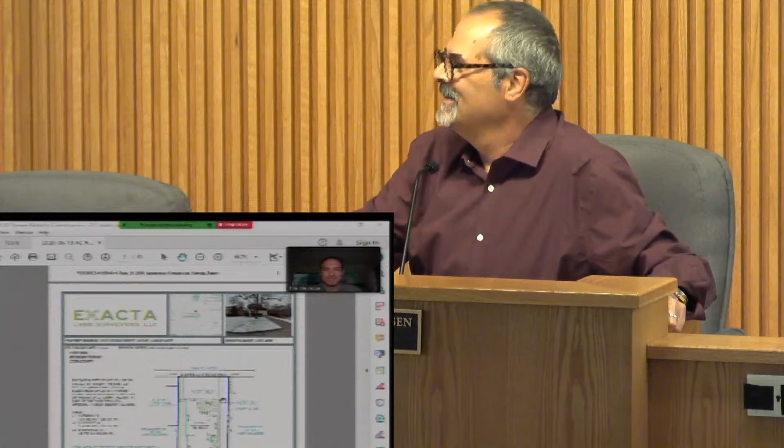Fantastic. All right, so the commissioners are just seeing it for the first time, so bear with us as we take a look. I'm happy to give a quick synopsis if anybody wants that, but I've been on appearance review commissions before, so by all means, let me know. It looks great, looks awesome. Yes, there you go. Floor plan. How wide is that lot? Oh, it's 50, okay, 50. Yeah, I think the survey measured it at like 49 something, but it's recorded as 50. Okay, no, it looks great, awesome.

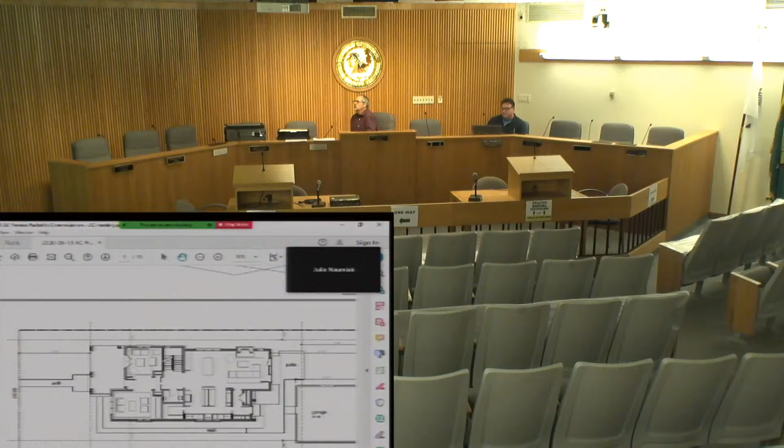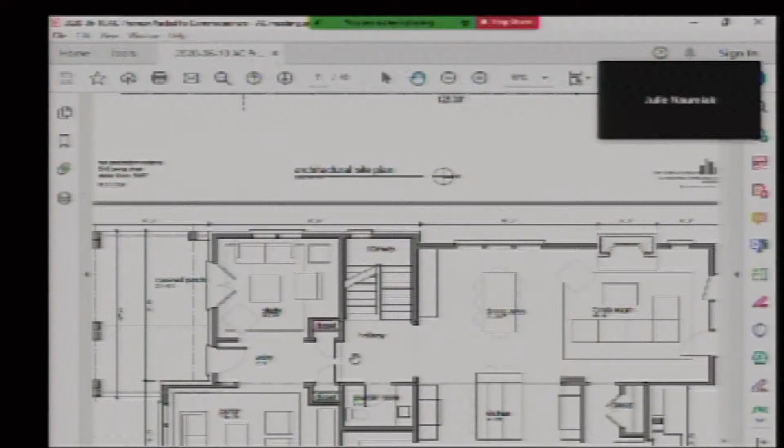And the aesthetic approval would also be subject to any code review at the time of permits. We would need to confirm the distance between the detached garage and the house, and any lot coverage will be confirmed by our zoning administrator. So there might be a few tweaks or another step that needs to be taken to make sure those code requirements are met. Yes, okay. I think I discussed that with Nate today, and yeah, if we have to make a few tweaks to the garage to conform, we will do that.

Okay, so front elevation, west elevation, full and partial. Sorry about that—I wanted to keep it at scale but didn't want to break it up, so I have a smaller full version and then the one that's at scale. I just couldn't get it to fit on an 11 by 17. So this is the full, and then this is a detail of the back, and these two are to scale.

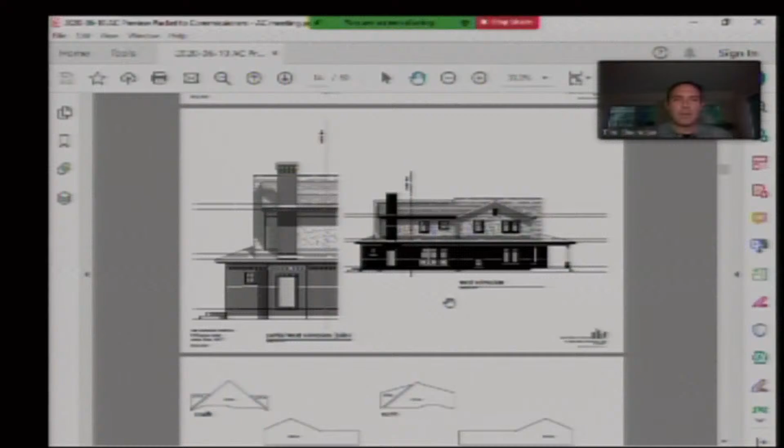Tim, can you walk us through the materials on that elevation? Or Carrie, go back to it—pick an elevation. That one? So that's the west elevation. We have the brick on the first floor, and then obviously the chimney.

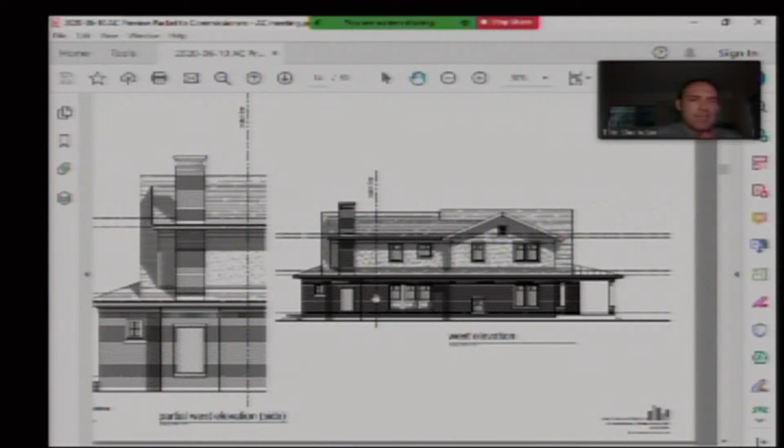That brick is listed, and we actually don't have the PDF of the material samples—yes, there it is. My eyes aren't that good, but it's a Glen-Gery brick, a white tumbled. The whole idea behind this project was to do something like a cottage, and Julie really worked hard finding this brick that she liked. The second photo with the mortar shows an off-white mortar that works well with the color of the brick.

Then a simple Timberline architectural roof, not a 3-tab or anything like that. Windows are black—that's a Pella color. I have a Marvin color too, and I can't tell the difference other than the shapes are a little different, but I think currently we're thinking we'll use Pella. If we end up with something else, we might have to come back if the color is really different, but since it's black, I don't think it'll be that different. We'll update everyone as we go through that process.

Then the stucco and the trim—the stucco is a bone white, and the trim is going to be a super white. So we're mostly white with black window trim for the most part. Correct.

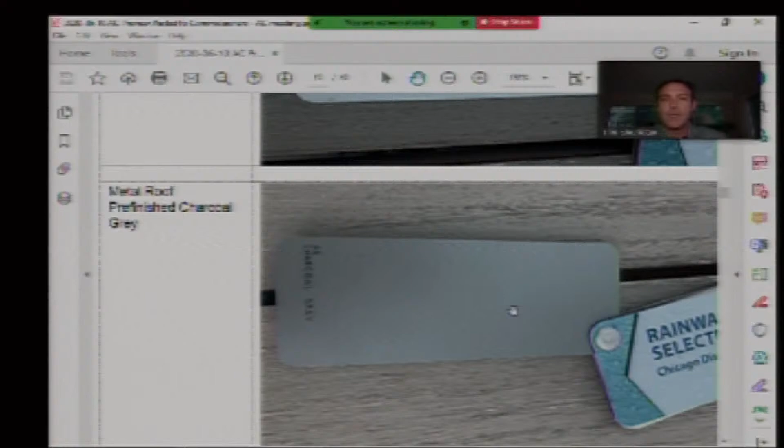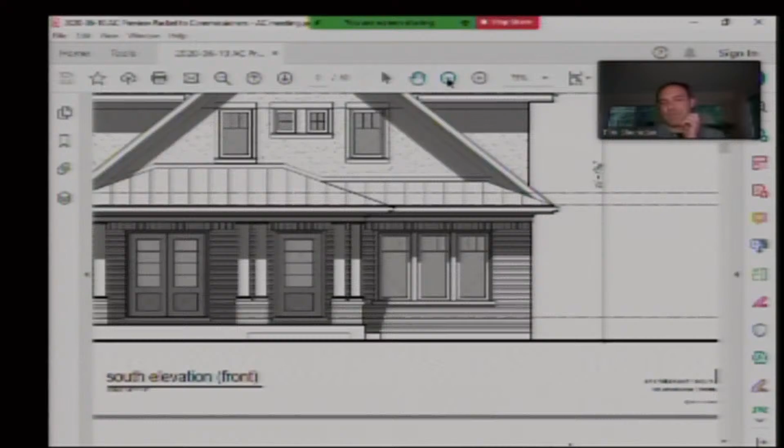Black roof, and then this metal roof is going to be a pre-finished charcoal gray, and that'll be for the porch. Could you go back to the porch, please, so we can see what that reference is? We'll get there—there's too many other things open here. It's all the way at the beginning. There we go—so yes, the porch and actually the little front part over the projected living room, or parlor as we call it.

Looks pretty good, Tim, it looks real good. Thank you, that's a beautiful design. I'm just wondering if the porch roof should be a little darker, if the roof is actually that dark—that's just a comment to provide contrast. It just looked like it's severely contrasting to me, that medium gray versus a charcoal.

Yeah, I think we were trying to do something that wasn't the roof color, frankly, and get a sort of contrasting color in there that wouldn't be black, because the windows are black and the roof is basically black too. So we wanted to have that sort of third tone—I think that looked very nice. It's just, that was just a question.

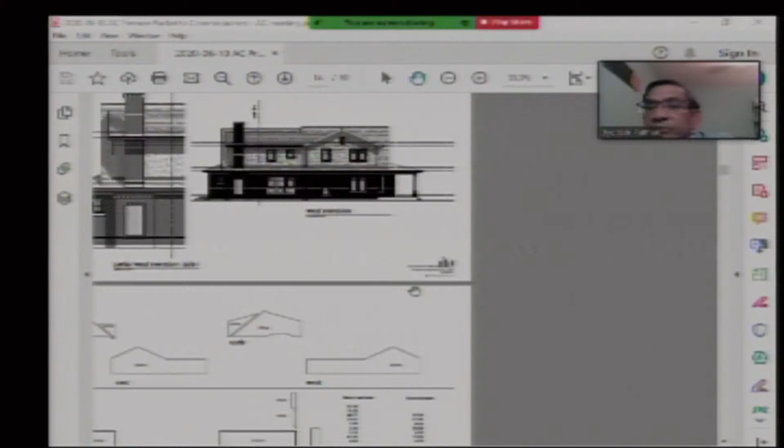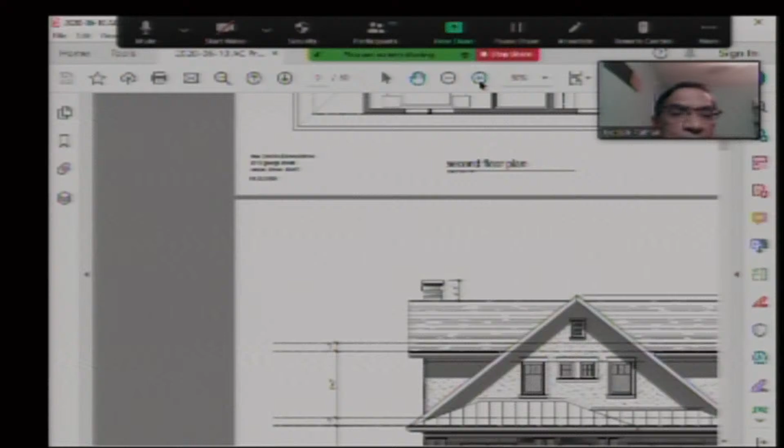Well, any other comments, Mary Jane, Jay, on that? I have just one comment—no, I like it, I especially like the brick. Yeah, I also like it, but I want to ask, the total height is more than 28 feet—is that okay? Oh, I think it's 26 something, plus if you see that 2.5 feet, it shows 26 and 7 each, or plus 2 feet 4 inches or something like that, so the total is 28 plus something.

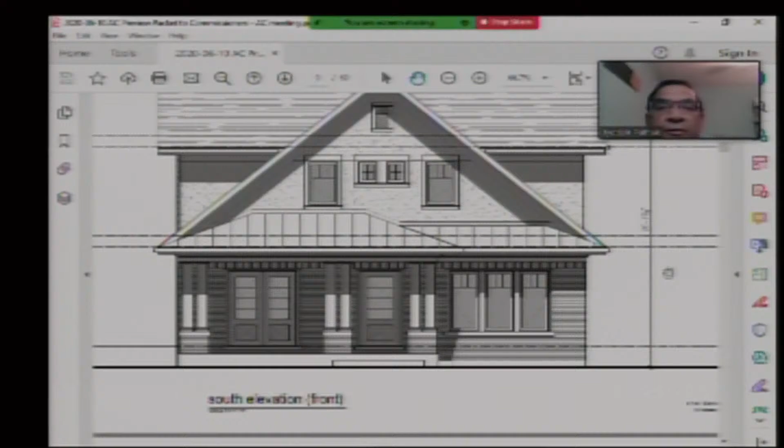Does the roof count in the overall height? Excuse me, does the chimney count in the overall height? I believe it just goes—well, it says allowable overall projection height is 26, 26 and 8, plus 2 feet 4 inches. So a chimney is an allowable projection, so this would be compliant, but I'll have the building administrator confirm that. Okay, yeah, I thought 28 was allowed.

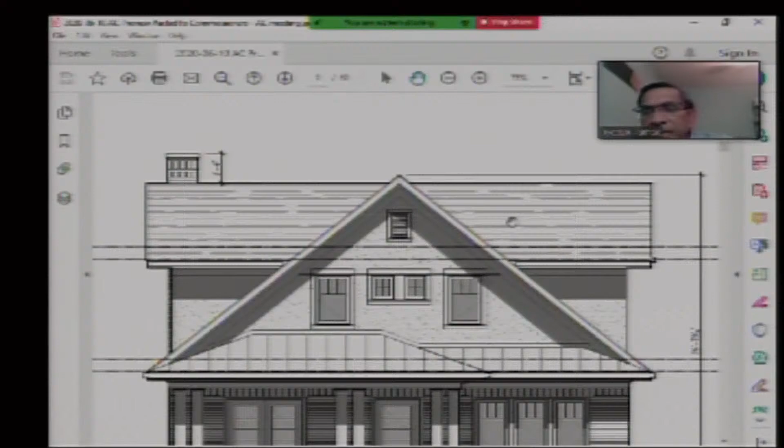Well, it would be higher than 28 feet if you take into account the chimney. So we can make the motion to confirm that it is compliant, Jay.

Okay, are there any other comments? Nope. Julie, do you want to ring this one up?

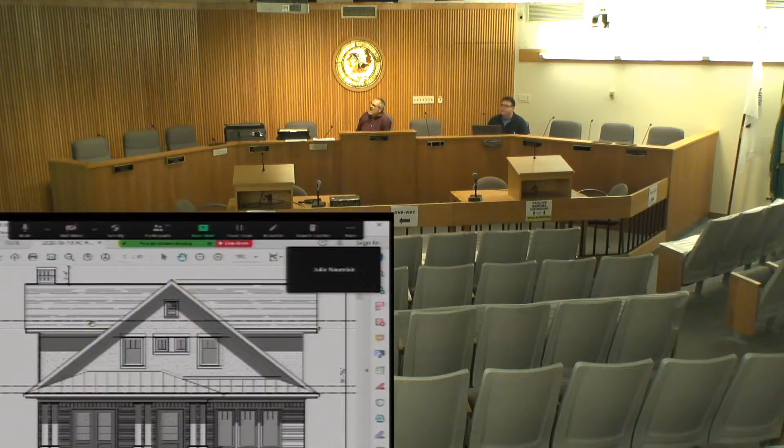Okay, I just need a case number. Case number is 2020-021A. Is that good, or should I zoom in more? 21A, okay, there we go.

Make a motion that a certificate of appropriateness be granted in case 2020-021A at 5312 George Street as presented. Anyone second? Second. All in favor? Aye? Any opposed? No opposed, so passed.

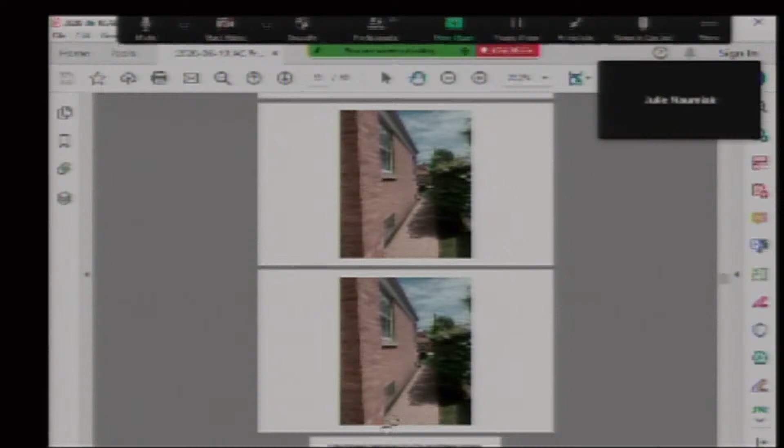Like a screen porch, and they're planning on enclosing it. So these are the existing photos of the existing conditions. This is the front of the house. This is an addition? It's enclosing an existing screen porch, so they're looking to fill in. There's no additional footprint, Carrie - it's heated, air-conditioned space.

Yeah, so any approval, though, we think it should be okay. The footing, we just confirm that it's compliant with code, so.

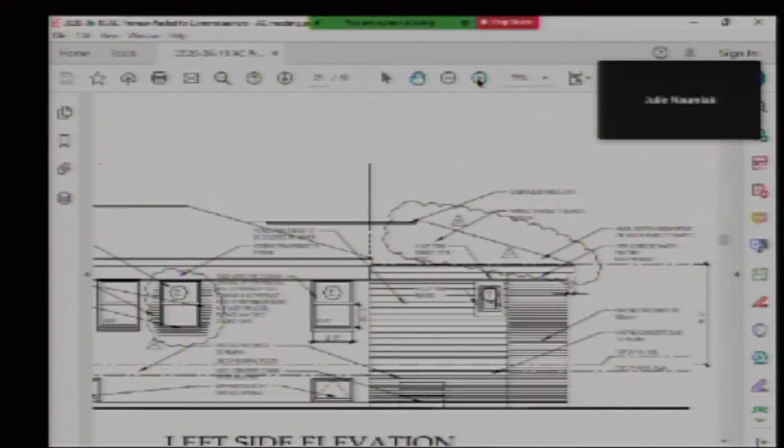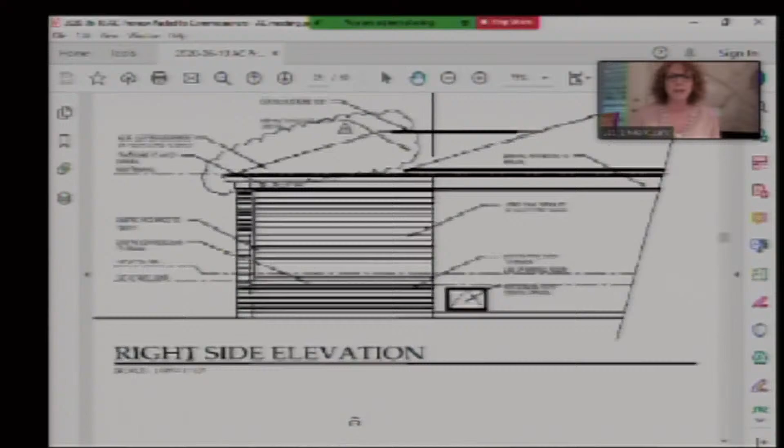I don't know if Leslie, if you would like to add anything? Sure, if that's helpful. This is an existing space that was permitted and added to this building years ago, like maybe 15 years ago. Completely permitted. It is on a full foundation. It is a raised square footage. It's just been a screen porch since it was built. It has a chimney in the corner of it, which was used as a fire, like a grill.

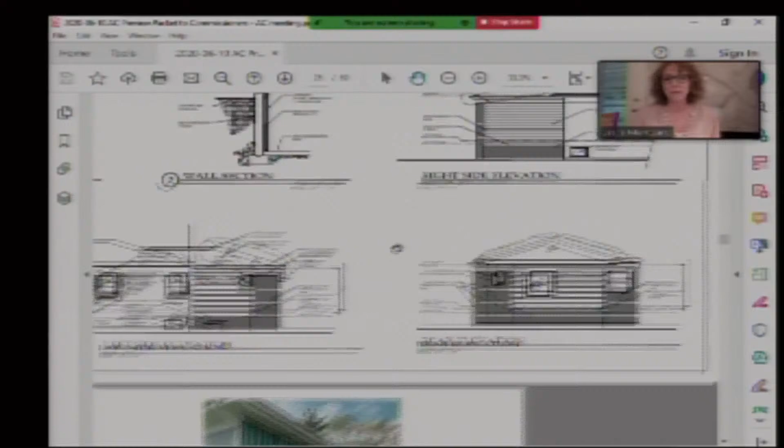It's very interesting, I'm sure it was the life of the party kind of house. But we have decided that most buyers would prefer to have a master bathroom instead of a chimney inside their home, so we're going to just hopefully enclose it. And it's a very simple change to the house. We're not adding square footage, we're not adding to the footprint at all. We're just enclosing what's already there. It's already on brick, really a very small change.

Hopefully you'll agree it looks a lot better than what's there right now. And the materials, Leslie? The existing brick will remain, and if there's places where it has to be repaired, it will be repaired with identical brick - it is still available. And then there'll be siding in the area where we enclose the screens, and the siding will match the front of the house. Okay.

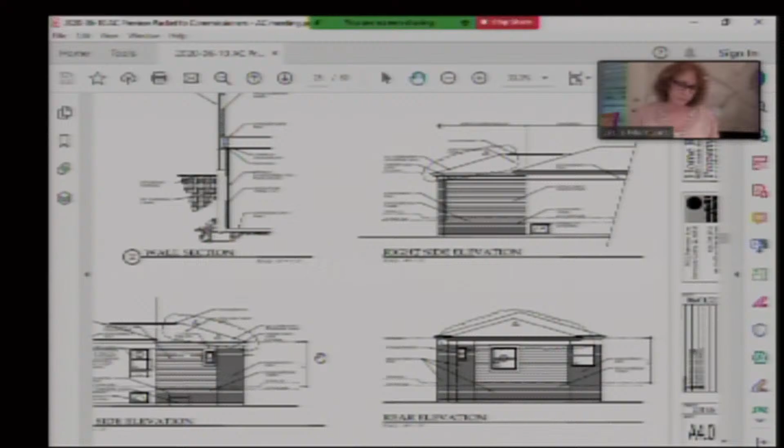Okay, sounds good. Comments, anyone? I'm okay with that. Okay, I'm good with it. Pat, do we have any comments from the public? No public comments have been received. Okay, I think it looks fine.

Jay, are you able to make a motion on this one? I'll make a motion. Case number 2020-023A, 9023 Laramie Avenue, to be approved as presented. Anyone second? Second. All in favor? Aye. Any opposed? No opposed, so passed.

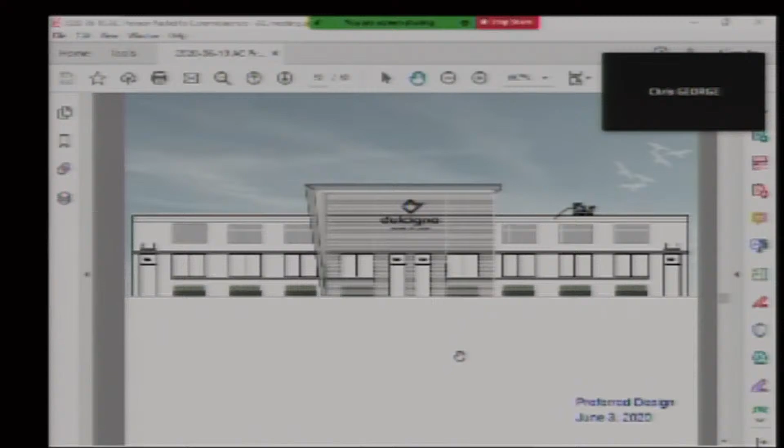Can you tell us about it? Yes. What we're trying to do is just accent the main entrance to the building. So we're sloping on the left-hand side, when you're looking at the front, it slopes up, projects a couple feet out from the building, and we're extending the parapet up to meet that across the front.

And then we're gonna put a new facing on the front. We wanted a wooden look, but maybe we could use some kind of fiber siding instead of those panels you're looking at now, a Hardie board or something of that nature that has a wood look. You can't use wood on it, but the wood look would probably soften the look on the front of the building. I agree.

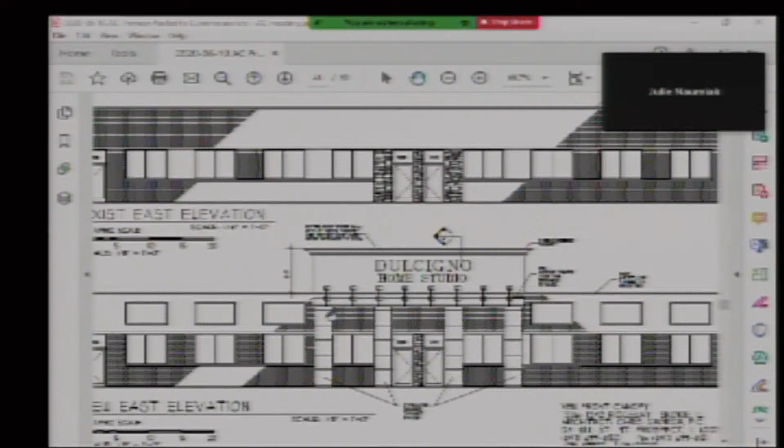So would you like to just skip over the previous design? That one's not gonna be used, right? Yeah. So this is the existing facade. And this is where the new entrance, the main entrance is, and that's where the new roof is gonna go. Big difference.

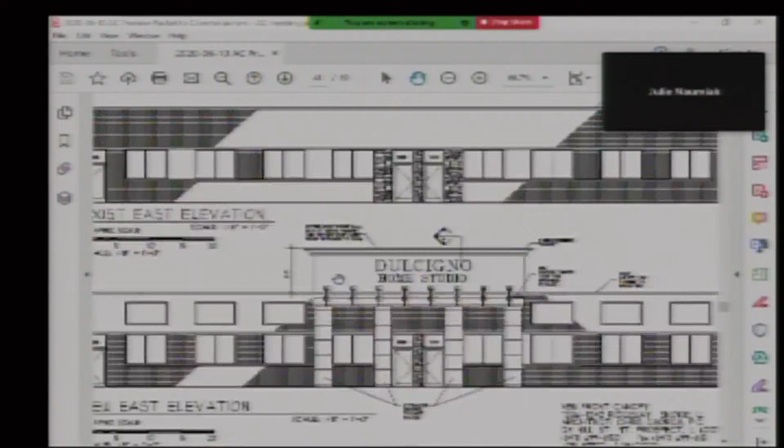I just want to note, do you know how deep you plan on having the roof project? A couple of feet. Okay, so you could go up to 3 feet by code, since the building is right at the 25-foot setback. If you choose to go deeper than that, then you would need to go through the zoning board of appeals. We're gonna keep it less than 3 feet, I don't think it's gonna be more than 3 feet.

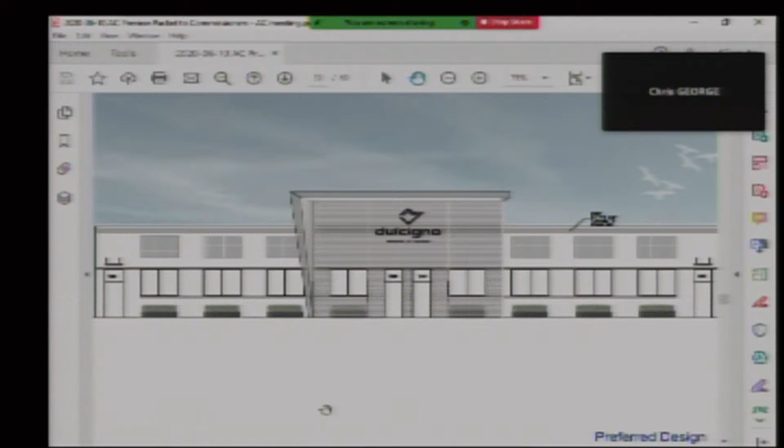So, with the exception of the entry, are you doing anything to the existing wings, the general elevation space? New windows would all stay. What we're gonna do is above the windows where you see the little colored areas, we're gonna just put some kind of a surface mounted accent to break up the brick, because the brick is so mundane looking across the front. Just wanna break it up with panels.

And we did discuss yesterday if the Appearance Commission supports the idea of these panels, to shift them a little farther away from the parapet, so it's more in proportion with the rest of the building, just giving it a little more breathing room between the top of the panel and the parapet.

So these are surface-mounted metal panels? Yes, or some sort of awning material. And the projection is a couple, 2-3 inches, it's not gonna be deep. So should it be companion or comparable materials to the main entrance materials? Wouldn't you think that would help? I would think that would help, yes. Something that matches.

I don't know if I like it. Staff, or commissioners, any thoughts on the panels?

I don't have a problem with them at all. Arshana? Well, I don't understand the rectangles above the windows. What purpose do they serve?

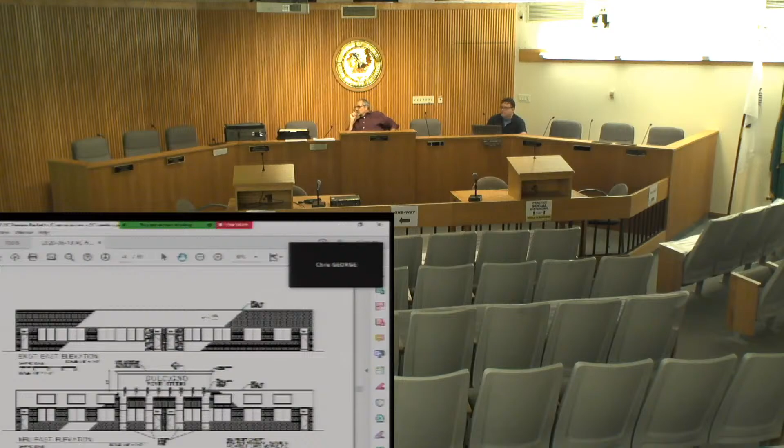I wish we had a picture, Chris, but that's just gonna break up the long mass of masonry that goes straight across the building. We were just trying to break that up, add more color, just something on top of those windows to look like some kind of awning or a panel, or some kind of, just to break up that.

It's decorative. Very decorative, just decorative, nothing protruding out. Nothing, just something decorative above that. Are you doing anything to the existing brick? No, nothing.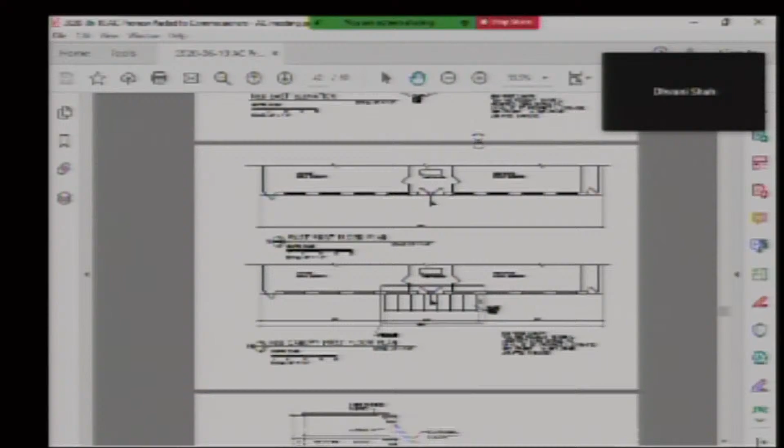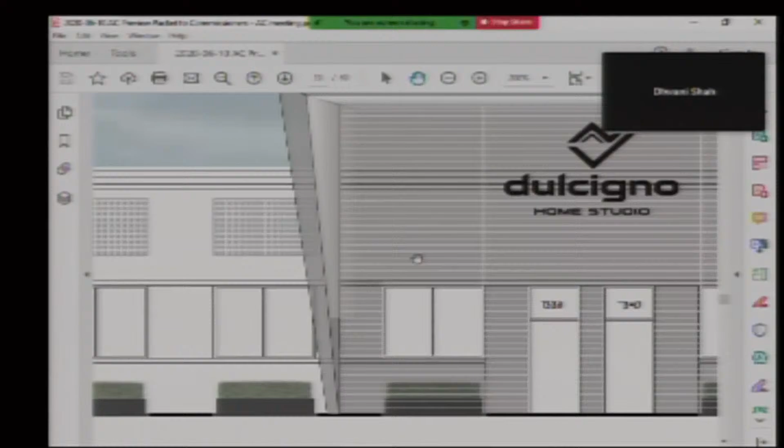Any other comments, Arshana, what do you think? Can you go back to the front elevation? I mean, the siding, can we space out the siding more, or? Like right now, how the elevation is, the front? What material are you gonna use? Is this what they were talking about wanted here?

Something with a wood look to it. So I was thinking maybe a Hardie board that looks like a wood grain, and that would be just mounted right to the masonry.

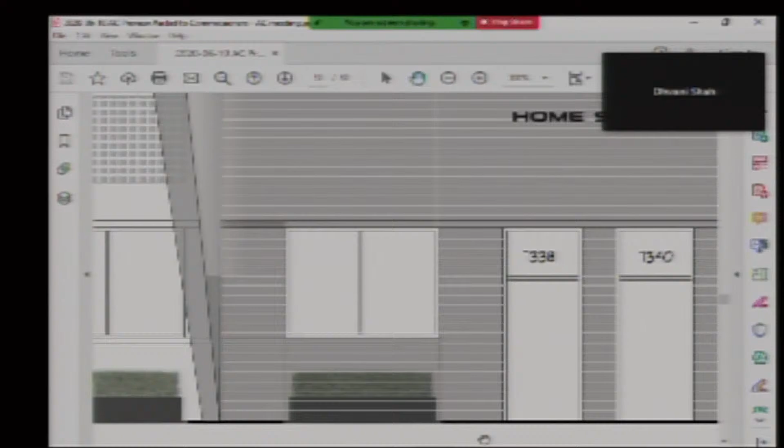Can we space them out more? Right now they look, is it going to look the same as it looks right now? Well, it would look like siding on a house, right?

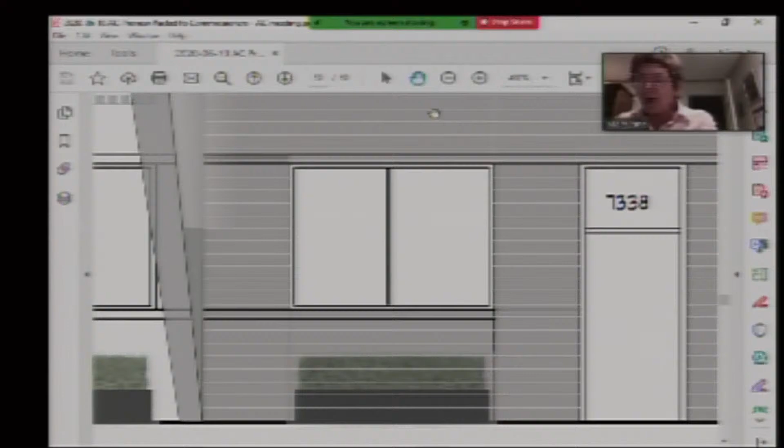So the gray is Hardie board because it looks like metal, kind of. Well, when the sketch was done, we were undecided on what kind of finish to make it, just like you see the squares on the decorative stuff. But if you could visualize siding, that's what it would be. And it's going to be Hardie board? Yes. Okay, thank you.

Well, I would be personally in favor of losing the surface-mounted panels, but I'll leave it up to the vote. Any other comments, commissioners?

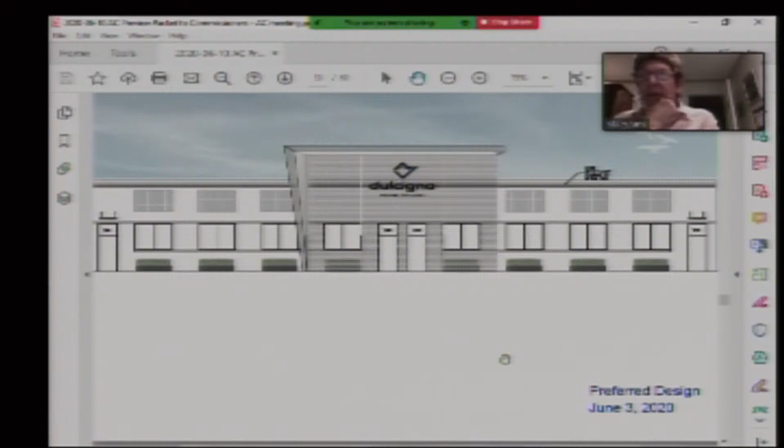Julie? You're okay? Yeah, I think it's fine. I mean, I think the panels, as long as they complement the focus of the center. The colors are cooperative. I think it's a better balance with that massive center to have some weight on the top. All right, well, why don't you roll that into a motion then?

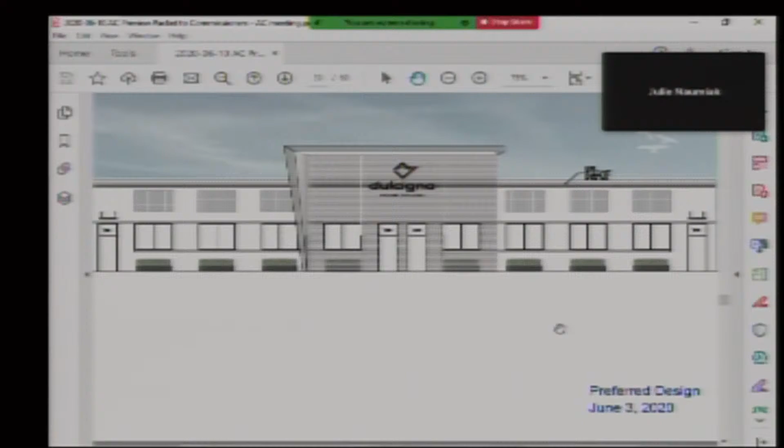You said it so well. Oh yeah, I gotta get a case number now. We'll get there. Oh dear, there you go.

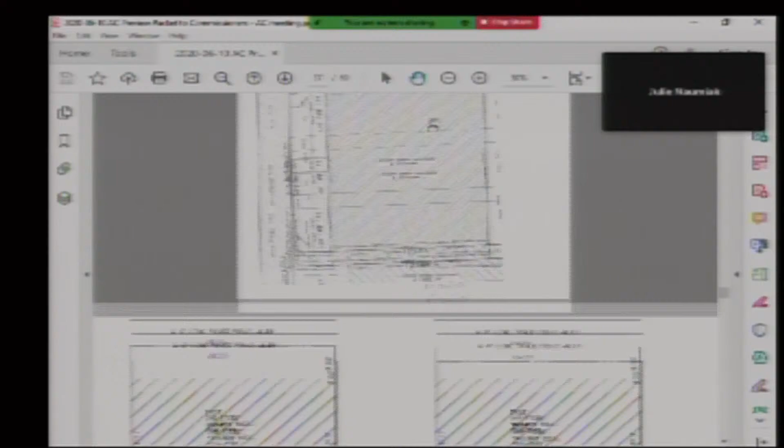Okay, I make a motion that a certificate of appropriateness be granted in case 2020-020A, 7336-7342 Ridgeway, with the provision that the focal center entry and the panels or decorative applications to the front of the building over the windows be complementary in color and type.

Anyone second? Second. Mr. Chairman, we haven't received public comment on this. I'm sorry, are there any public comments? Thank you, no public comments. I heard a second. All in favor? Aye. Any opposed? No opposed, so passed.

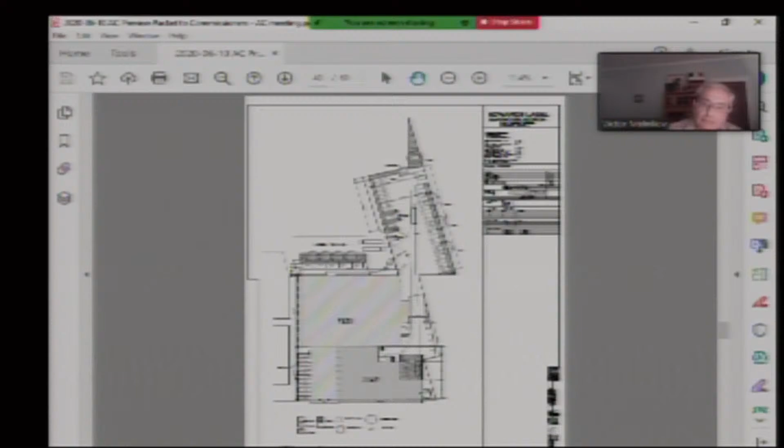All right, bear with us as the commissioners get to see it for the first time. Okay, here. So this is the whole site here, and this is the existing building. And then this is the proposed addition, zoomed in for the addition.

Victor, would you like to discuss the design? Yes, materials and colors. This addition, this warehouse, occupies the interior courtyard of the existing building. It is bordered with industrial zone buildings on the south and on the west, and the existing building on the other two sides, so it's completely inside the existing territory. The addition is offset from the west side about 65 feet from the property line, and on the north side it's offset from existing property line about 200 feet.

This is the metal paneling for the exterior, combining vertical and horizontal paneling in two colors. The light color is sandstone. This is the existing elevation, and this is the courtyard that's supposed to be built, enclosed. The combination of two colors, one is granite from the PAC-CLAD company. These colors aren't very representative, but you'll see the combination of light bronze and kind of tan sandstone. These are the colors we propose, with windows, square windows with a dark bronze frame.

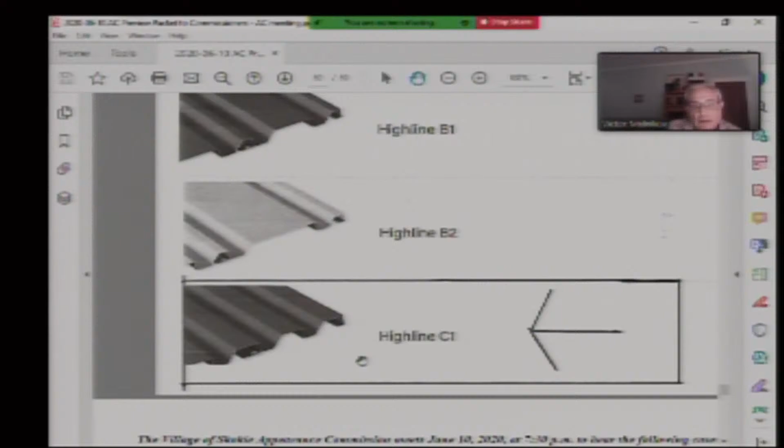This is the profile we suggest for the exterior paneling, and this is the texture. We already passed preliminary design with the commission, which has no basic objection to the building.

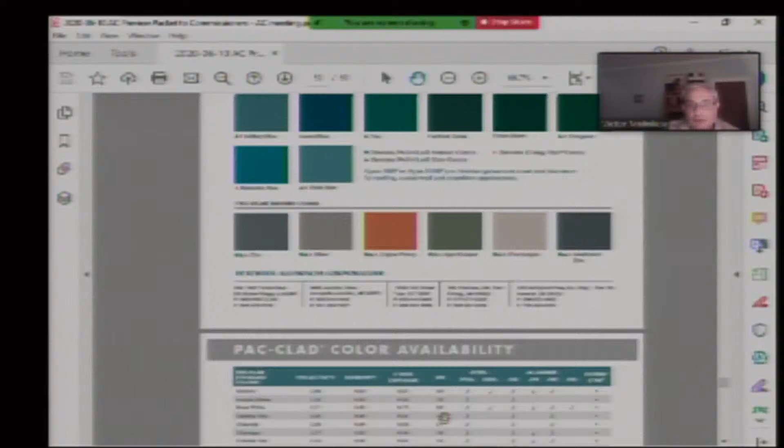That's all, looks good. Are you doing anything to the other existing elevations? No, it remains like it is.

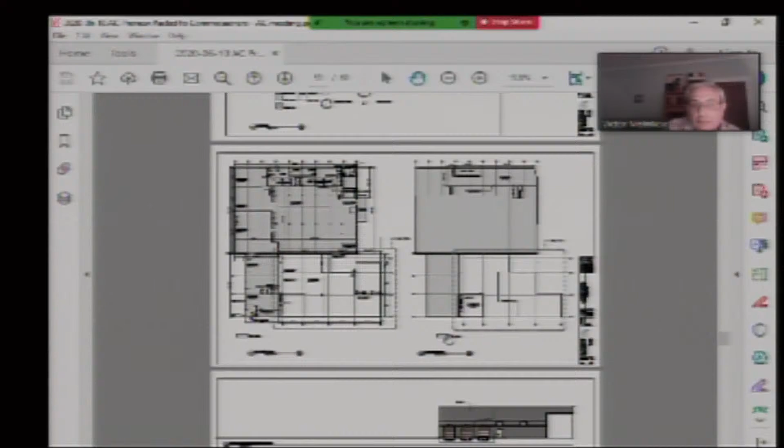So Julie, could you go back to the plan so I could see? This is like the vine wall that had vines on it, and this was the painted light color painted concrete masonry. There's an alley here. So how do we transition from the new elevation to that existing elevation that it butts to? We'll work on the south elevation.

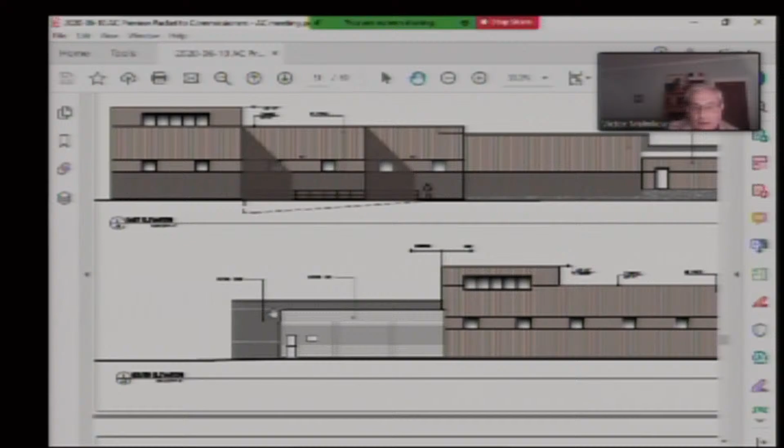This south elevation faces very close to the industrial building. It's not visible actually, this is a garage from this side of the building. So it's in the distance right here, this darker brick, and then this is kind of projecting south of the existing garage, and this is the proposed south elevation of the addition. So on the south, it's completely enclosed by the existing building.

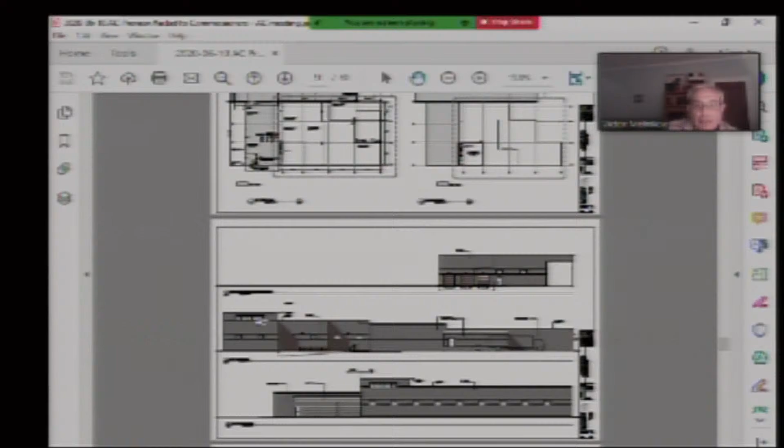What about the east elevation, what does that face? This is the east elevation right here, faces other industrial buildings. And this is where the loading docks are located. Here it is, yeah, so these are the loading docks.

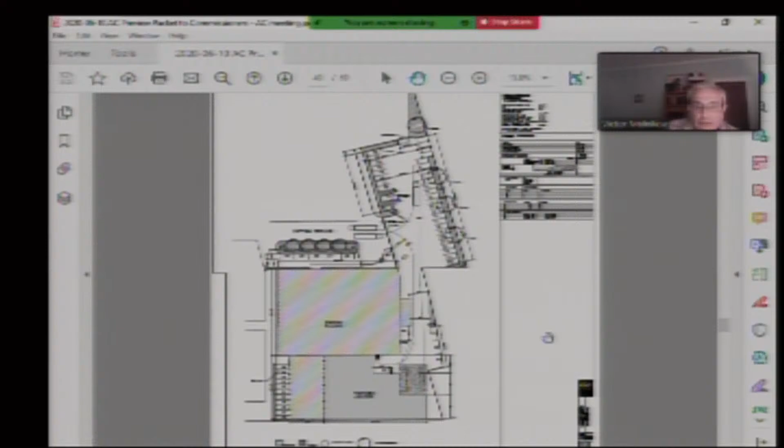Any comments, commissioners? Everybody okay with this? I'm okay.

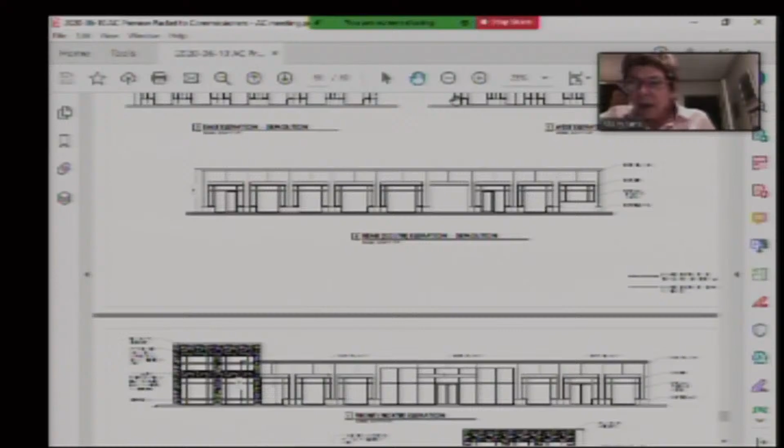Actually no, I think it's University Dermatology, the building next to it. So this is the general area, I think to the east of Athletico, a big building.

So this is the addition. Does the north elevation have any frontage on Gross Point at all? No, the parking lot's directly behind that. Right, okay. So Gross Point is kind of angled that way compared to this picture, it's kind of this way.

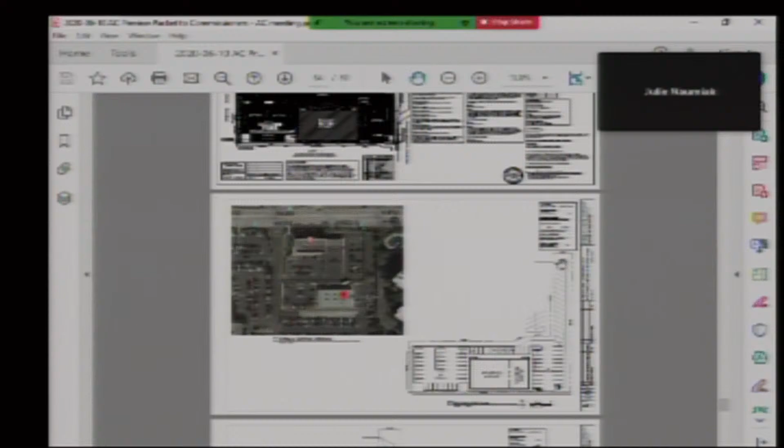So this is the addition on the east end. Black and white elevations. Okay, and this is existing.

Enrique, are we doing anything to the existing elevations? You know, I'll have to ask. So to give a little back history: University Dermatology, the east tenant, are actually now the new owners of the building. That just happened within the last six months.

So he actually wants to expand his office spaces in essence. That's kind of what we're going here with. I haven't gone fully through the design with him yet, I've been waiting for comments back from him. So if the decision is that maybe we should do something with the existing facades, I'll have to bring it up to him, or maybe it's the other way around and we take the design of what we propose.

So just so you know, the color scheme on this building was based off the new building he just built out in Niles, St. Joe, Michigan. He was kind of like, just pick those colors. And I'm like, okay, well I need a little more input, but I need to submit something so you guys can give me feedback, so I can go back to him and give him the feedback and we can go from there.

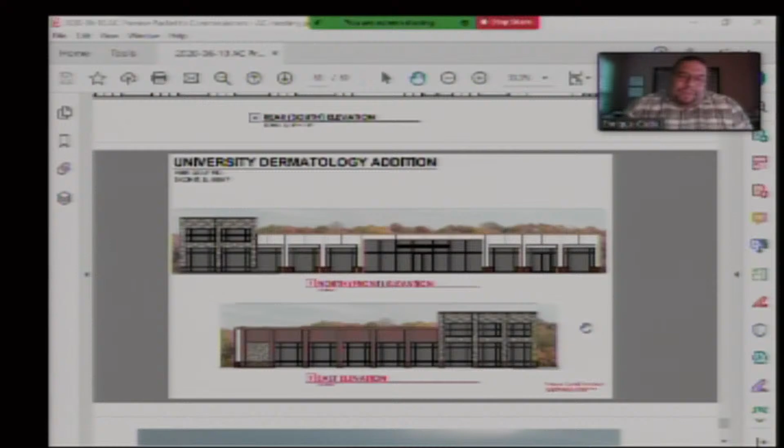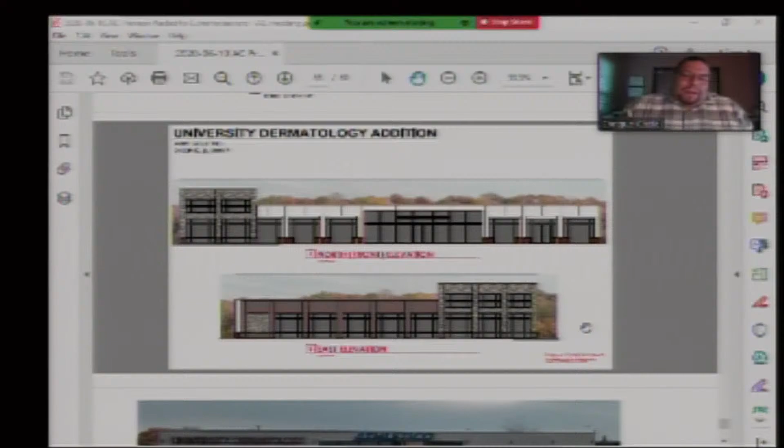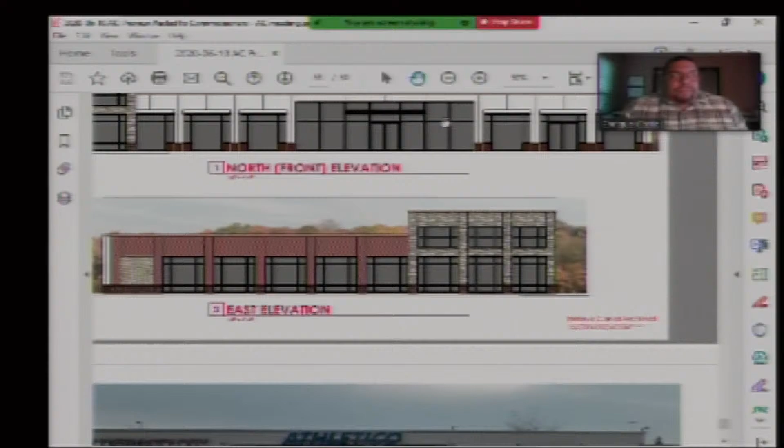So material-wise, we have a sandstone, cut stone material on the front, on the east side facing the parking lot, on the north face facing the Golf Road, and on the west side, similar material, just to create the frontage, kind of a tower element that he wants to create at that front end. And then the rest of the building is basically like a brick material, red brick material.

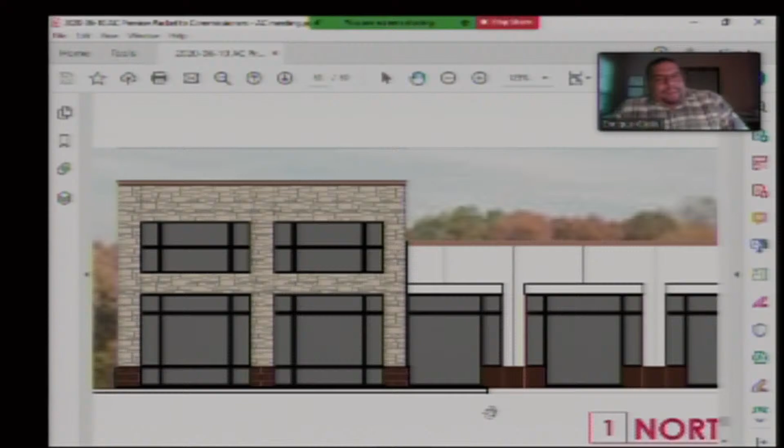Kind of to match the red wall that's across, in front of the senior apartments across the way. So that's a similar concept there, and basically match the base color, because right now there's a brownish or blackish tile that runs along the bottom band of the building. The existing building right now is basically a white stucco building with white canopies, a tannish metal coping on top, and a dark framed window around the whole building.

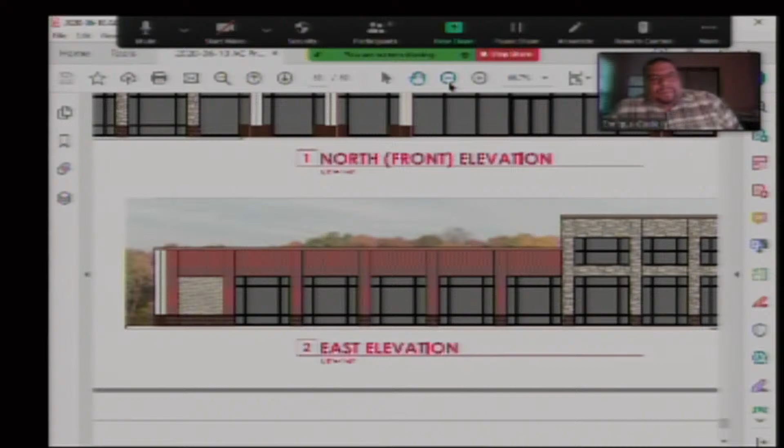The existing is, you said it's a stucco finish? Yeah. And we're going to introduce stone and brick to that.

I don't like that idea. Yeah, I'm a little, it's a little mixed media for me too.

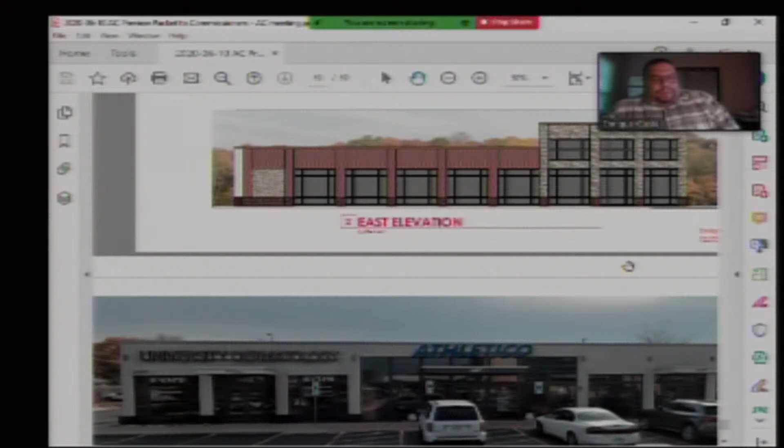Materials. Is that real stucco or is that an EIFS material on the original? No, I give the drawings, I think it was an EIFS when it was built, whatever, 20 plus years ago.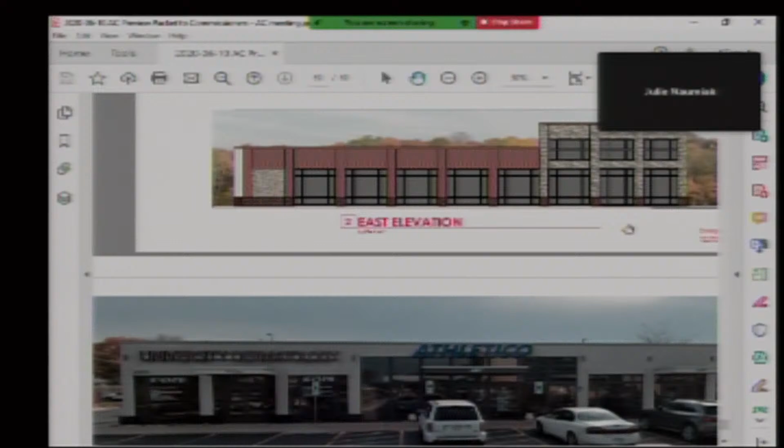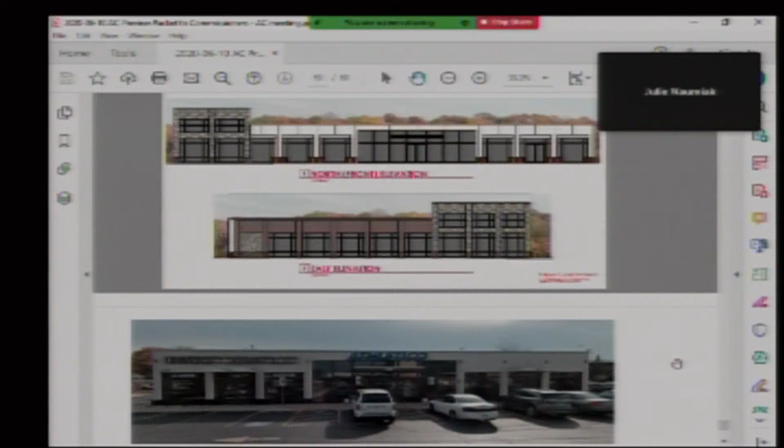Yikes. I don't see the point of three materials personally. Yeah, I think you need to rethink that. I think there's too much going on, especially considering the signage. I mean, it's a riot on the eyes, or shall I say civil unrest.

Anyone else, any other comments? I could see a stone and EIFS combination, or a brick and EIFS, but not all three. Yeah, I think the addition doesn't seem to be integrated with the rest of the existing building.

Thank you, Mary Jane. That is a two-story addition, correct? No, it's still one story. It's just that we're creating a tower element because he wants to bring in as much light as possible at the reception and front of the space.

Right now he has a very small suite, and he's trying to make it a slightly bigger suite and have more of a grand entrance, because he owns the building now. He wants his end to be the more focal point versus the Athletico.

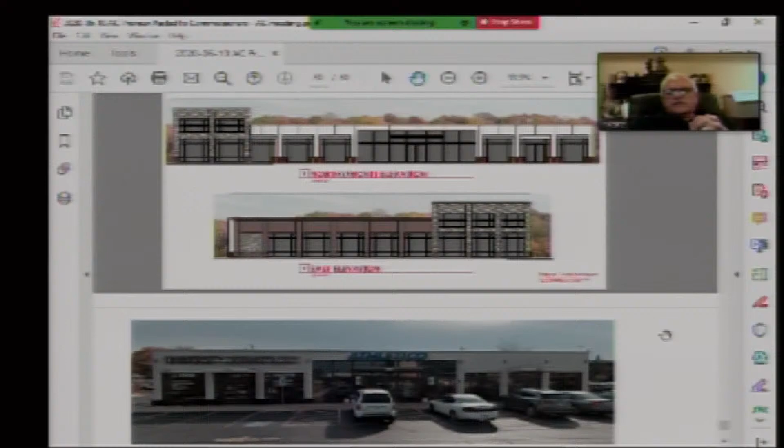Tom, can I ask a question? This is Nathan. Hello Nathan, please do. So, obviously the addition is very attractive. One thought is maybe we do the stucco to match the color of the brick of the existing building, just a thought.

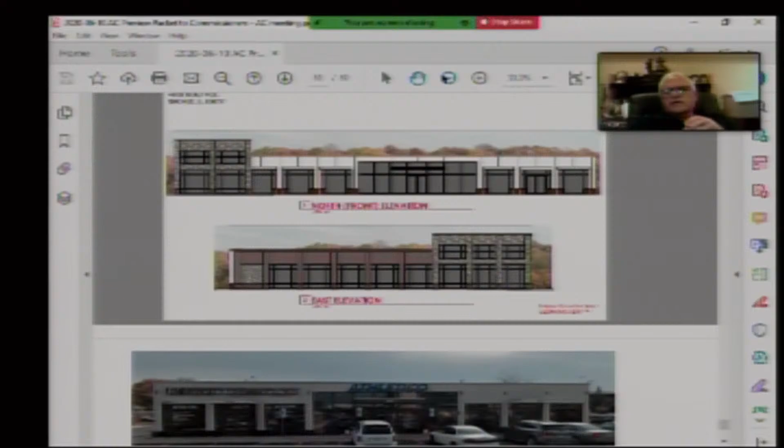But I'm also wondering if that two-story element would even be seen. Isn't the bank going to cover most of it? At that point, the bank is actually more on the western side, if you go to the survey picture. So yeah, basically it's blocked from the west.

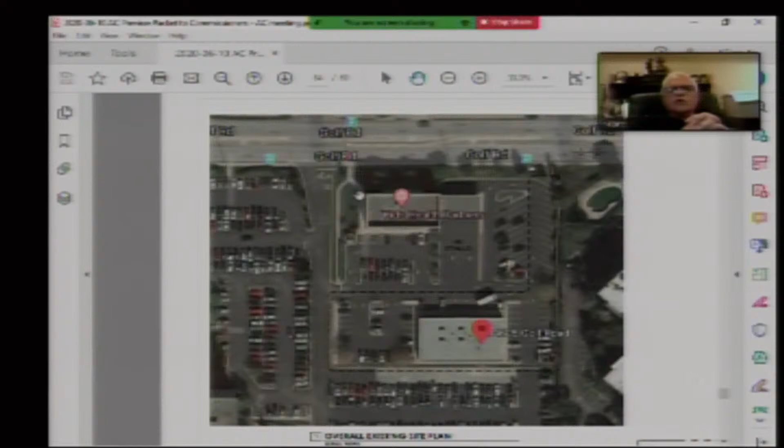I thought the bank was north. Yeah, it is right there on the picture, there's a driveway next to it. I mean, you can see from Golf the stone, the new addition.

Sorry, Archana, say that again? I mean, you can see the new addition from Golf. Yes, you can. The longer east elevation, not so much, it's exposed to the parking lot primarily, but you could still see it.

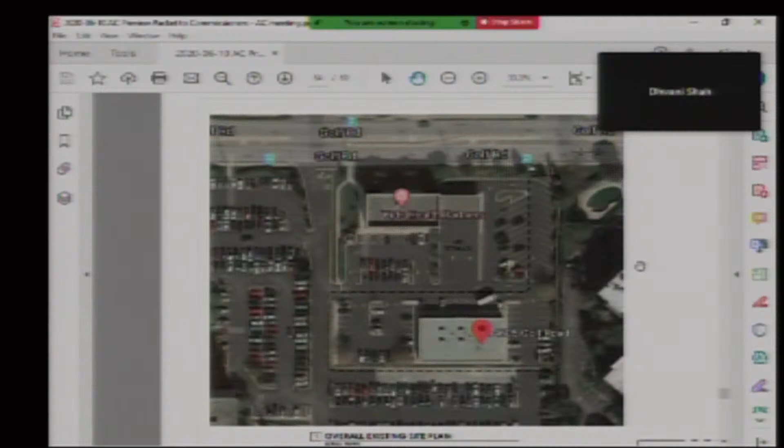I don't mind the asymmetrical elevation. Can that be made on the other side? That I'll have to ask the owner about. I think we're having trouble with a variety of things here, the multiple materials, and this somewhat lopsided design of the higher facade.

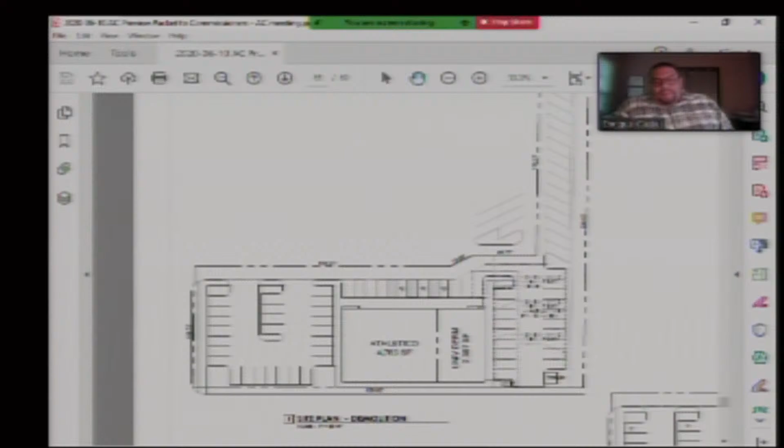How wide is the addition? It's about 19 feet wide, basically taking out a row of parking. The front part ends up being about 25 feet since it wraps around the existing building. It's 14.2 feet here, the building is low, it's 14 feet tall now, and I think I was going to make it about 20 feet, so it's about 6 feet taller on that front bump-out part.

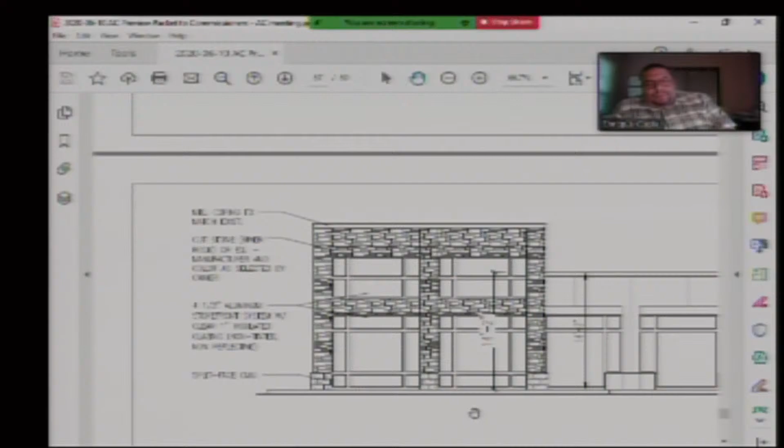Carrie, that's the prominent elevation we're looking at, correct? That's the north elevation facing the golf course, yeah.

I hate to say this, but I would almost suggest that you just match what's there, and do something else with the east elevation. I understand that 14 feet versus 19 feet tall is not the end of the world; on drawings it looks a little worse than it probably would actually be, but I just think the selection of materials is not harmonious there, and I probably would not be voting for it.

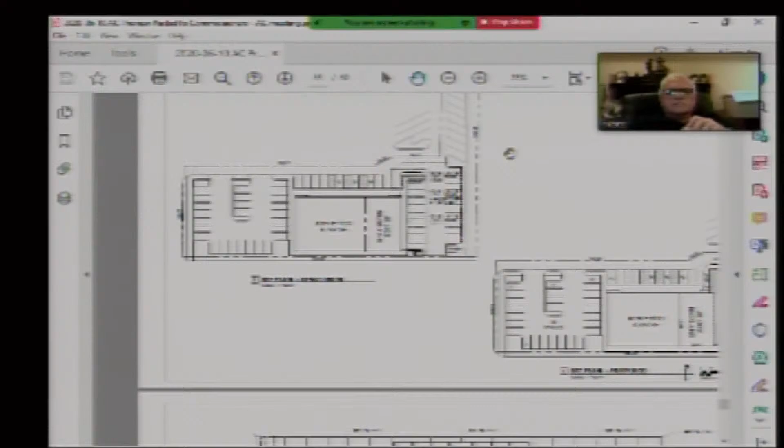Anyone else? The east elevation you won't see because that faces the condominium, which is about 4 or 5 stories high. So I'm almost okay with what you do on the east elevation because it's just not going to be seen.

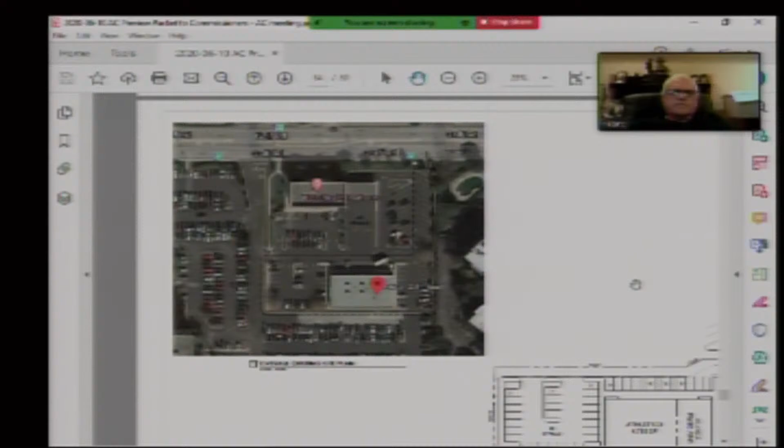The north elevation, I think a more comparable selection of material compared with the existing might be in order. Yeah, that's a good idea. I don't mind the bump out or the height, I just think that the tonal combination of the whole exterior needs to be more harmonious.

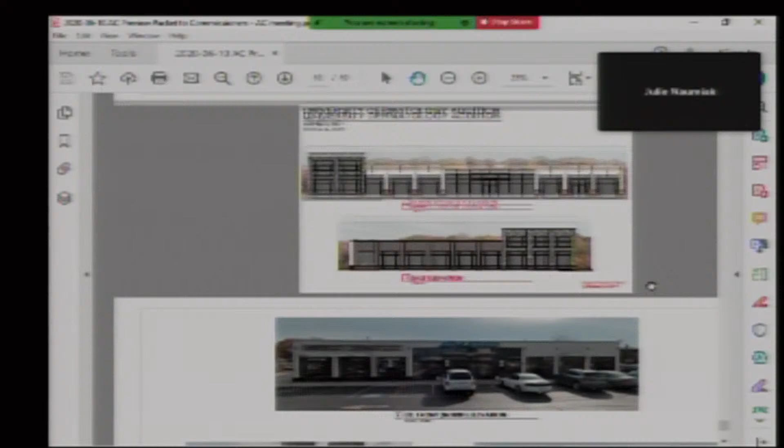Or maybe even giving, I know you're not dealing with Athletico, maybe giving them a nice taller front entrance also to kind of balance it, bringing the same stone elevation to the Athletico front door. I'm not saying it would help, but it could. It's still off balance, it still looks off balance to the east side, with the story and a half vestibule.

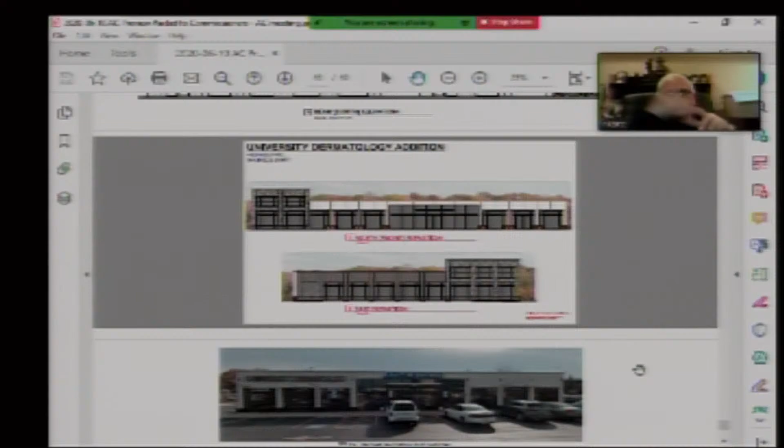Any other comments? How do we feel about this, fans? Do we want to vote? Anybody feel up for a motion, or continue? Enrique, what do you think?

I basically have to go back and present what you guys have said to me, and kind of lock him down on materials and a little bit more on design. He's the guy that's like, let's get going, let's get the permit going. I'm like, oh wait, there's processes with Skokie.

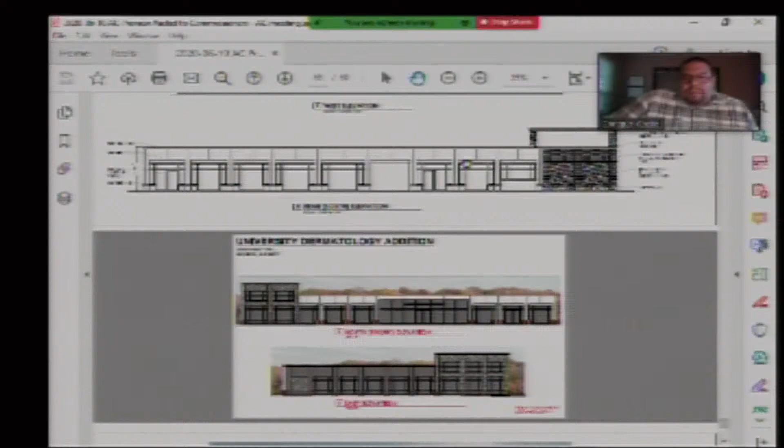So I think the message you bring to him is that there are too many materials going on, and if he wanted to select something akin to what's already there, it doesn't necessarily have to be EIFS or stucco, but maybe a color palette that's more sympathetic with the existing. That might be one option. And if he wants to consider adding on to the west end of the elevation to balance off the height, we would consider that. I don't think that's a major issue, but I think the materials are, so a different selection of materials might do him well.